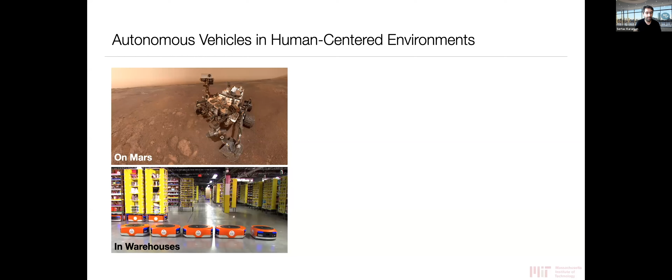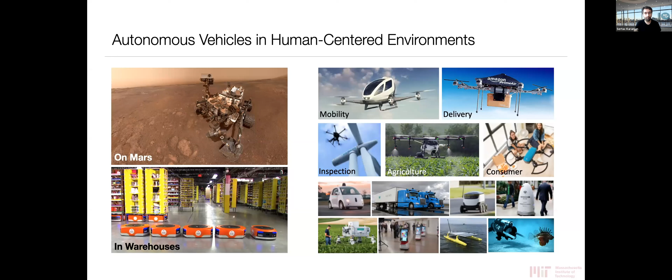We're doing a number of different things in this arena to introduce autonomous vehicles into human-centered environments. I'll give you a quick example. One thing we're looking at is when autonomous vehicles encounter human-driven ones, how should they behave? For example, would you build an autonomous vehicle that cuts into every human driver, or one that is extremely cautious and waits for every other vehicle to come forward? One thing we've looked at is introducing something called social value orientation from social psychology, a metric that social psychologists use to measure how people behave.

And in particular, they look at how people behave in terms of reward to themselves and how people behave in terms of reward to others. It turns out that looking at people's social behavior and psychological behavior, you can actually understand how people behave in different ways, and then you can engage with people in that manner.

For example, if you find people who are more altruistic, they'll stop for you if you're an autonomous vehicle so that you can go. On the other hand, if you find people who are a little bit more egoistic, who try to maximize reward for themselves, they will not stop for you, so you'll have to wait for them in traffic if you wanted to get into the environment of an autonomous vehicle.

We've been developing a number of algorithms and testing a number of strategies. For example, we've looked at different kinds of data sets to understand as an autonomous vehicle comes together with other vehicles, can we look at other human-driven vehicles and try to estimate on the fly whether they're going to allow us to merge or not in a highway. In other words, are they going to be altruistic or egoistic? And depending on that, we can cut in front of them or not.

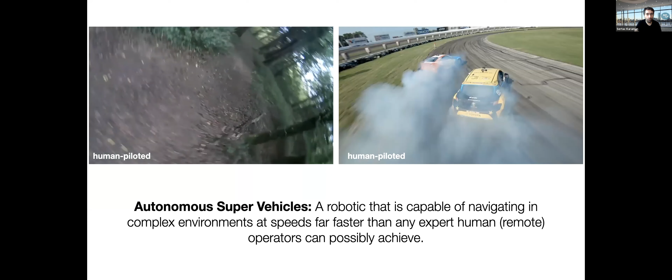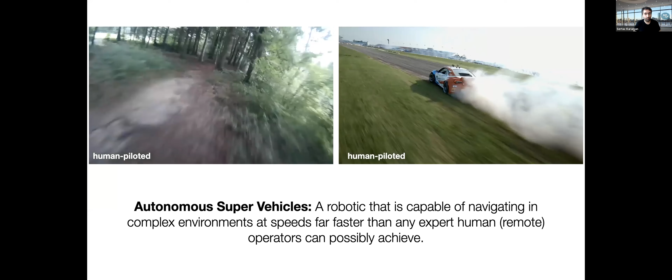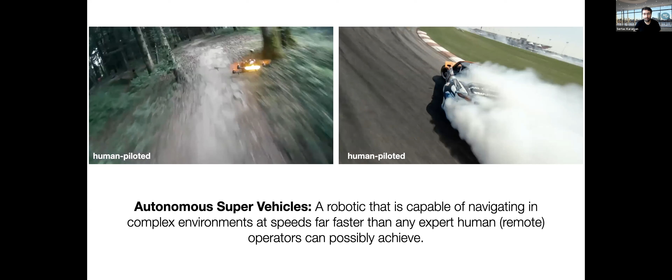And humans can do a number of other things. For example, there are events that they can fly - humans can fly drones through complicated forest environments, and humans can even fly drones to film things like racing events. You can imagine if we were able to do the same things autonomously, we may be able to use drones in forest environments for search and rescue to find people who are lost, or to find people after disasters. And if we can do the thing on the right, maybe we can automate some of the events for the media.

In my group, we focus on something that we call autonomous super vehicles. We try to develop robotic vehicles that are capable of navigating these kinds of environments far, far faster than any human possibly can. As humans, we have certain limitations in terms of, for example, how fast information can possibly travel through our neurons. Autonomous vehicles don't need to have those. This has a big impact on autonomous driving or driving in general as well.

There are more than 30,000 people every year who die in traffic accidents just in the United States, and more than 1 million globally. Imagine taking all those fatal accidents and, right at the time of an accident, turning on an autonomous super vehicle that can run cameras reaching up to 1 kilohertz, think far faster than any human, and just nudge the car so slightly that a fatal accident became a near miss.

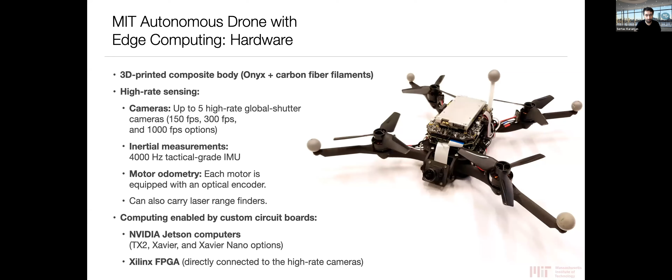We've been building a system, currently in the form of a drone, that has a 3D printed body. It has cameras that can go up to 1,000 frames a second, inertial measurements that are tactical grade running at 4 kilohertz, and we even put odometry on the motors, which I'll show you in a second. It can carry other sensors too, and it uses FPGAs and GPUs at this point to do computing.

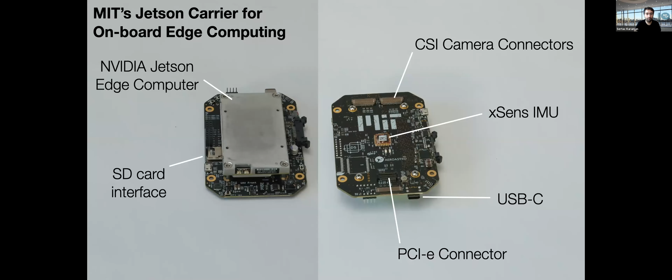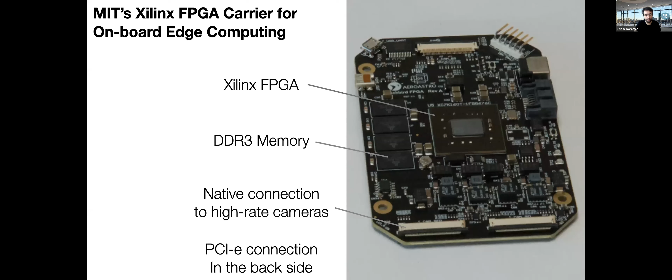In order to do that, we had to build our own circuit boards. We built our own NVIDIA Jetson carrier in our group, which I believe is one of the most advanced carrier boards out there for NVIDIA Jetson computers. It features a USB-C port, a PCIe connector, an IMU, CSI camera lanes, an SD card interface, and much more. We've also built a 10-layer circuit board that carries FPGAs and DDR3 memory and connects the cameras using native high-rate camera lanes, and this board connects to the other one using the PCIe on the back side.

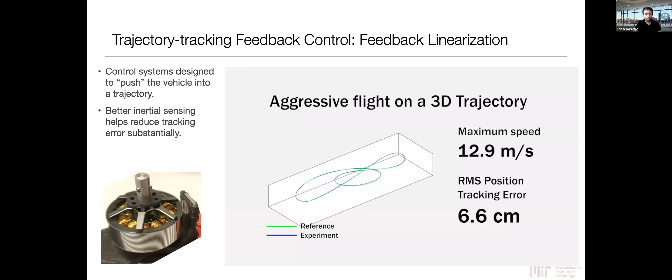I'll show you what the system can do in a few videos.

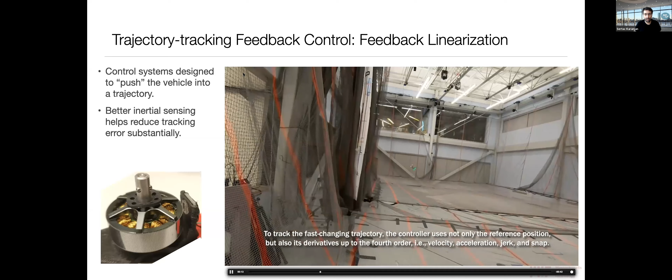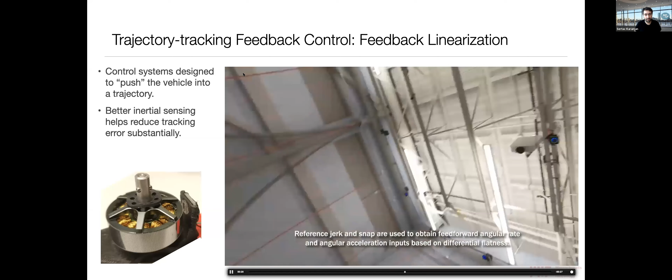Here you're seeing our drone flying in our motion capture laboratory, a large laboratory we have at MIT equipped with motion capture cameras. The drone seems to be doing some crazy motion, but it's trying to track trajectories as it flies extremely fast. These trajectories are tracked as the drone goes up to 30 miles an hour in an environment that measures barely 7 feet, introducing about 6.6 centimeters of tracking error, using some very high-rate odometry on the motors.

We can do a number of other things. For example, we can turn the trajectory to be followed into a circle, and the drone will naturally flip around to go through this.

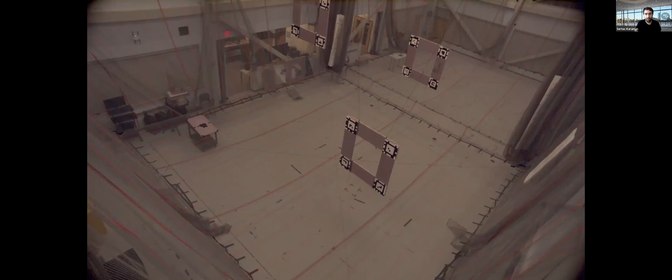Here is one event that we've been considering. You'll see the drone in the upper left corner as it emerges. It races through a number of gates, turns around in a circle, then flips around to pass the last gate, goes very quickly into the final gate, and finalizes the turn.

Building autonomous vehicles this fast is quite challenging. You set up these gates, run your drone very fast, and build a drone with massive amounts of sensing and computing that probably costs, if you build one by one like we do, more than $10,000. You hit one gate and you lose the drone—not only the $10,000, but also the time spent building it.

So we've built a sort of virtual reality environment for drones. We fly the drone in a motion capture room, take its position and orientation, run it through a game engine, and generate camera images for the drone, passing those back to it. In this way, the drone flies in a completely empty room but hallucinates a different environment that it's flying in, and it's very safe—if you crash into an obstacle, that's just virtual and nothing really happens.

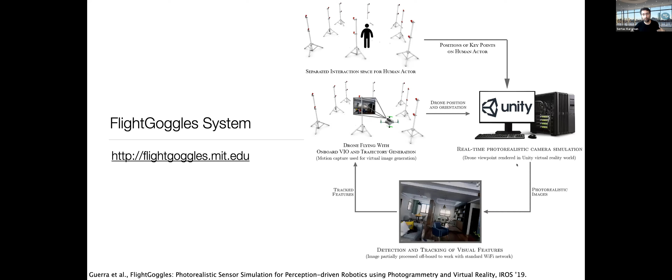So you can rewind back and retry. We can also connect humans who are in a different room so they can be together present with the drone. We get a chance to do a number of different things by connecting a variety of environments, putting drones in, or sometimes putting miniature vehicles and humans together, and we enlarge the vehicle so that humans and vehicles can be in the same space.

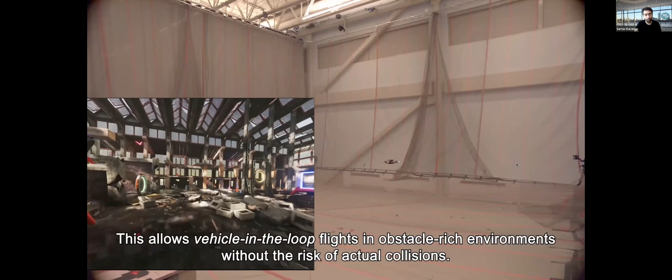Let me show you an example. Here is our drone flying in a warehouse environment. The environment is completely virtual. You can see the drone is actually flying in an empty space and hallucinating, if you will, this other environment in virtual reality. Here, one of my students is in a different room, just walking around, and the drone is going around this person to film him. They're in completely different physical environments, but in the same virtual space.

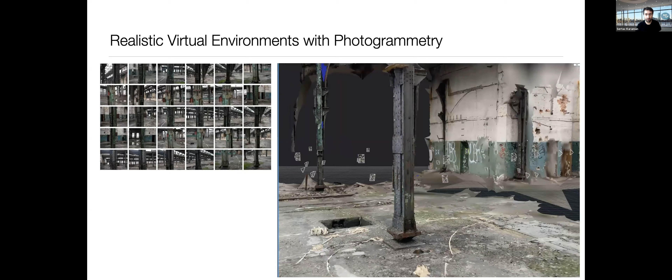In this manner, we built a very large environment, sort of that makes up a warehouse. For this purpose, we've scanned 80 different objects, generated them in 3D, and used 1,000 instances of these objects to generate this environment that you're seeing. And that's where our drone was flying. I'll get back to this environment in a second.

We've actually utilized this environment in an autonomous racing competition that was fully virtual, and then later we made that competition fully real - I'll get back to that in a second. But I'd like to let you know, although it's not officially announced yet, I'm saying it publicly here for the first time: we've been building a fully virtual version of 2 floors of MIT Stata Center.

MIT Stata Center is, I would say, one of the landmarks of Boston. It's a Frank Gehry designed building. It includes MIT's Computer Science and Artificial Intelligence Laboratory, as well as the Laboratory for Information and Decision Systems, where part of my lab is also located.

So here I'm showing you a bunch of pictures - I didn't make this into a video so that you can see it better. These pictures you're seeing are not photos; these are actually renderings of what we can achieve in scanning these environments into virtual ones. These shots are from the basement of the building, and here are the shots from the first floor of the building. We're still building this environment.

Once we build this environment, we'll be looking at a number of other things - for example, can we learn in virtual environments and transfer them to reality, if we can build virtual environments in this much of a realistic way? We will also be using this in some of our teaching efforts that I'm going to mention at the end of my presentation. I'd like to mention one thing before I continue to the next part.

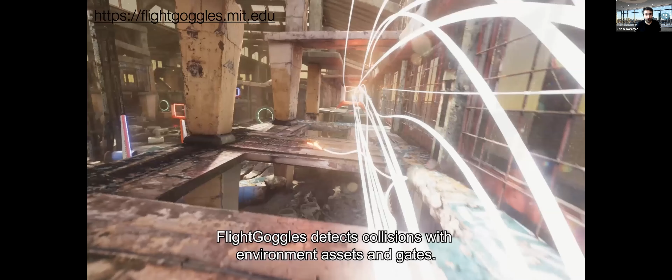So they race - all the people who participate, all these teams that I mentioned, race one by one. But I'm just putting their trajectories and how their drones navigate fully autonomously in the simulation environment all together. As you can see, these are the top 20 teams in the challenge, and they're doing pretty good once you're in the simulation challenge. Of course, there's a whole bunch of crashes that we've also observed as people try to go through the simulation environment, but in general, people have been doing extremely good.

I'd like to say that the simulation challenge is something that we've done back in March of 2019. We've invited these teams to MIT for the first time in June of 2019, and then we've done the real racing challenges with the real drones between October 2019 and December 2019. I'm happy to announce that in December 2019, we've actually awarded University of Delft in Netherlands a $1 million prize after they won the challenge.

So next in my list, after talking about autonomous social vehicles and autonomous super vehicles, is autonomous miniature vehicles. When I talked about autonomous aerial vehicles, a lot of people imagine vehicles of this size that you can hold in your hand, maybe following you around or doing certain types of inspection.

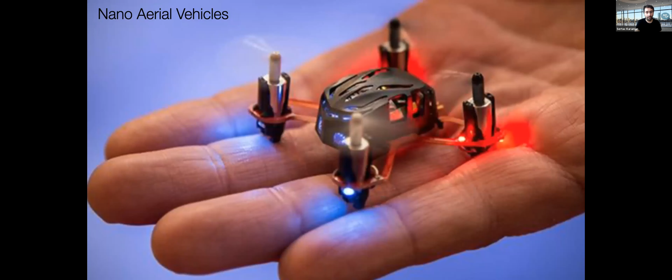But this is not as small as autonomous vehicles go, even though we call them micro aerial vehicles. There's vehicles this size called nano aerial vehicles, and there are even vehicles that can fit on a bigger fingernail. It turns out that at this scale, motors become extremely inefficient, so it's much more efficient to flap your wings to fly. If you look at this landscape, there's a big difference in size, and as you can imagine, a big difference in energy consumed in operating.

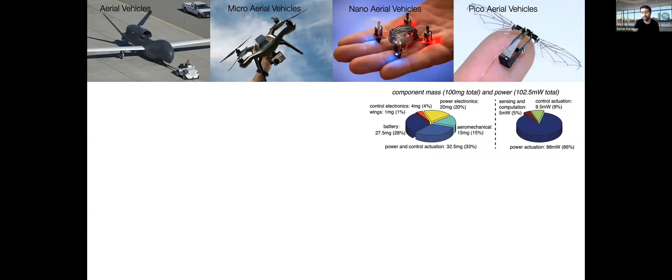For example, the vehicle in the upper right, the Pico aerial vehicle that's the size of a fingernail, takes only 100 milliwatts to lift itself and fly around. On the other hand, typical computers we utilize, like the powerful CPUs and GPUs that fit on cars, could consume as much as 100 watts. Even the embedded GPUs we use in building intelligent drones are about 10 watts. So you need 10 or maybe 100 watts just to turn transistors on and off so you can understand your surroundings, while it takes only 100 milliwatts to lift itself.

So what we've been doing is actually designing the computers required for these vehicles from the ground up—not just the algorithms, but the computing hardware and algorithms together—so we can achieve similar intelligence to what we see on drones or imagine for autonomous vehicles today, but at a cost of around 100 milliwatts.

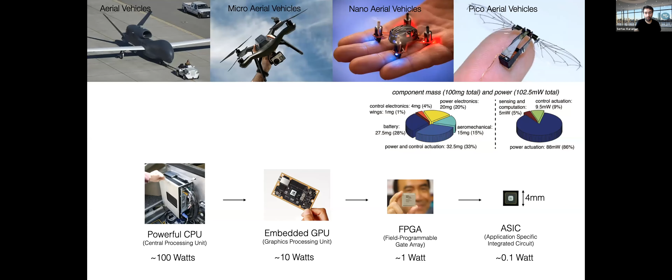This has a number of applications. I call them autonomous miniature vehicles—for example, little flying vehicles or little satellites. There are also applications for vehicles that can walk on water, soft robots, or even insect-sized ground robots. And there are opportunities not just in miniature vehicles but in long endurance vehicles too, like blimps that can stay in the air for maybe years.

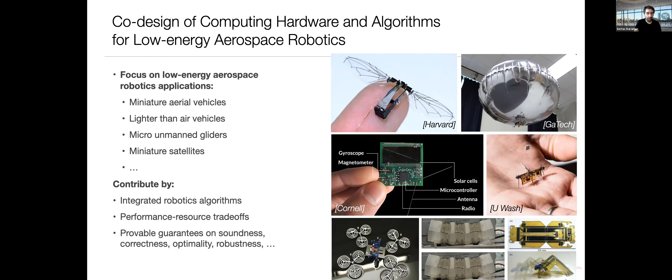We've done a number of things in this domain, but one thing I'll introduce is a chip we've developed that consumes only 2 milliwatts on average running at 30 frames a second, and 24 milliwatts at 170 frames a second. It measures 4 millimeters by 5 millimeters, is fabricated on a 65 nanometer node, and can run visual inertial odometry together with bundle adjustment in the back end.

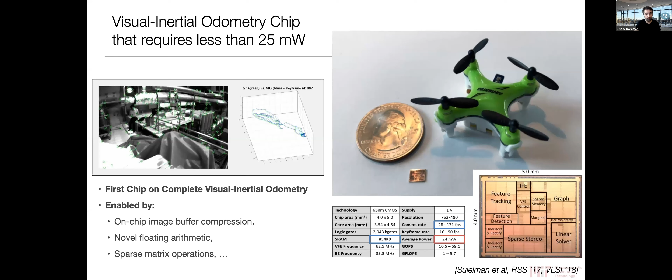So you can imagine what this can do, as you're seeing on the other side: it detects a number of features on the camera image and tracks them. It then integrates that tracking information with inertial measurement data to find the position and ego motion of the camera, IMU, and chip system with respect to its starting point. These kinds of technologies are extremely useful for miniature vehicles, as well as for virtual reality and augmented reality devices, or similar technologies like on your smartphone.

There's a number of other opportunities in this direction. For example, not just visual inertial localization, but we've been looking at how we can do depth sensing—imagine taking a camera input and generating a depth image so you can understand where obstacles are. We've been looking at computing for exploration tasks to determine the next best places to go. There are even some very interesting, challenging, and intellectually stimulating problems in decision-making and planning.

For example, if you try to plan a path that reduces energy consumption for actuation, like fuel or battery consumption as you fly, you may think very hard to find a trajectory that expends very little battery during execution, but you just spent so much energy computing this path. In some sense, you need to balance how much energy you expend computing a path versus actually executing it.

So there are some very interesting problems at this intersection of circuits and robotics, where we look at low energy systems.

I'd like to say that all of this autonomous miniature vehicles work is joint work with Vivienne Sze, who also has a talk in this Autonomy conference tomorrow at 11:55 a.m. She'll go into much more detail on autonomous miniature vehicles, as well as her own work on AI. If you're more interested in this part of the work, please tune in at 11:55 a.m. tomorrow.

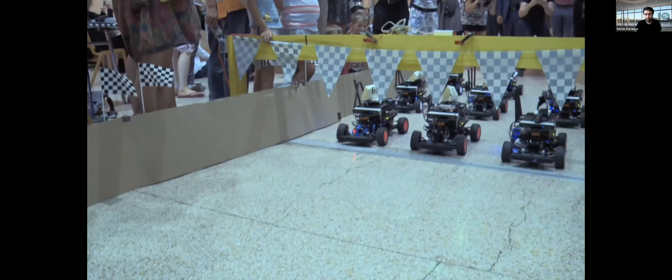I've been working since 2016 on a high school program called the MIT BeaverWorks Summer Institute. This program started in 2016 with this video you're seeing, as a summer program for high school students. It was a spin-off from my undergraduate robotics class at MIT called Robotics Science and Systems, for which we had developed these little miniature cars you're seeing.

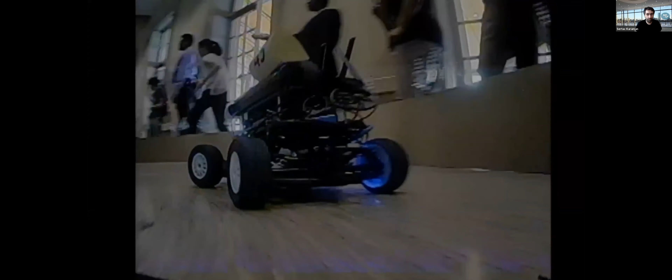And for the first time, we kind of gave it to high school students so that they can develop fully autonomous software that makes these vehicles, little vehicles, fully autonomous, so that they can understand AI, they can understand robotics, and they can get excited, and we can kind of embed them into STEM fields.

We started the program in 2016 through the MIT BeaverWorks initiative, which is an initiative between the MIT School of Engineering and the MIT Lincoln Laboratory. And I kind of spun off for the first time my class as an autonomous race car Grand Prix. These are the students that we attracted at that time: there were 46 students coming from all around the United States. So this was in 2016.

In 2017, we actually grew it into 2 more courses, one of them was inspired by the other undergraduate course that I teach at MIT, so we introduced that as autonomous air vehicle racing. We attracted, in this case, 100 students who came to MIT as residential students, spent 4 weeks at MIT, and we also, prior to that, had 300 students online who would take an online class during the spring semester.

And in 2018, we grew this to 200 students who spent 4 weeks at MIT, taking one of the 8 courses at that time. And admittedly, at this point, I wasn't able to teach 8 courses myself, but we had a whole bunch of staff, about 80 people helping out from MIT Lincoln Laboratory from a number of different fields. At this point, we grew the program, not just the autonomous racing, although the autonomous racing part was about

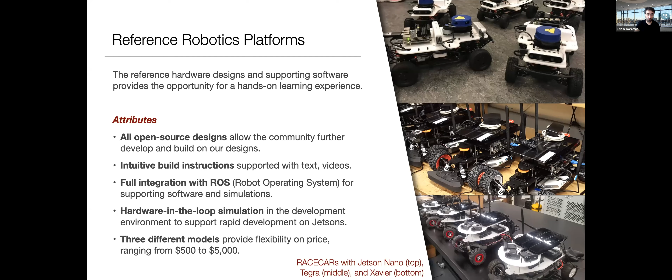We're also building a large platform for hands-on online learning, so that students can tune in and try out a bunch of different kinds of classes on their own. They can learn in that way, and then we're also kind of making this into a bit of like an app store, whereby people can put their own courses running on the same sort of vehicles and same sort of development environments.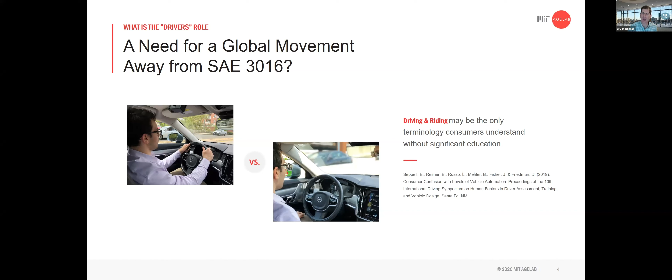A number of years ago, now in its fifth year, I formed the Advanced Vehicle Technologies Consortium at MIT, which is now supported by about 17 different automotive stakeholders, from manufacturers such as Toyota and Jaguar Land Rover, Audi and Volvo, to safety suppliers such as Aptiv, Veoneer, Lear, Google, as well as other key safety stakeholders, to begin to look at how people are using advanced driver assistance systems, early stage automation, automated driving features such as Autopilot, Super Cruise, Pilot Assist, and other related technologies in production vehicles on roads today.

How do we look under the cover at how people are beginning to leverage technology to help inform and build better educated guesses as to how to innovate forward tomorrow? A lot of the world in autonomy has looked to the far reaches of what may be possible 10, 20, or 30 years in the distance. I, for one, believe there's a lot we can learn from looking at what's occurring today to iteratively move faster in changing the safety landscape on the road today, and getting technology from the classroom, from the laboratory, into people's hands to improve mobility decisions.

So how do people adapt to these technologies? How do they use them, or avoid using them, to begin to leverage technology more strategically as part of our lives? One of the things that we quickly realized is that there is a huge data gap.

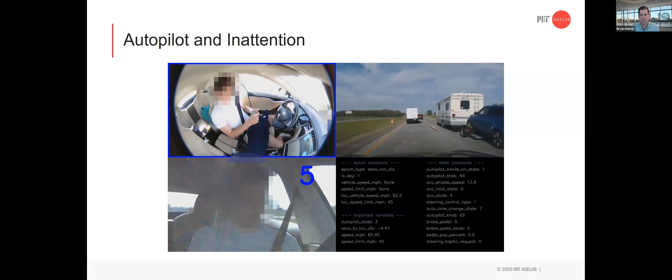In the video here, we can see an individual driving in one of our equipped vehicles with Autopilot, fidgeting with something in their lap, reacting to emergent changes in the roadway environment. Who would expect that an individual is going to attend to the world around them when the driving responsibilities are no longer there? Perhaps it's the salient looming effects of what's going on around us, but what's going on on our nation's roads, and the changes in risks and fatality numbers, are really predictable based upon some of the technology changes that we see.

The automation is good for a first generation system, but it's the innovative driver management system that is really critical. So when much of the technology world looks at the automation here, they say, hey, it's not really that good. Well, it isn't. It's not aiming to be a level 4 or level 5 automated system. It's aiming to be a system that includes the human as part of the decision loop, leveraging human expertise when it makes sense and machine intelligence combined together, fused together, much as the aviation industry has long proved since the early 80s was the key to cockpit safety.

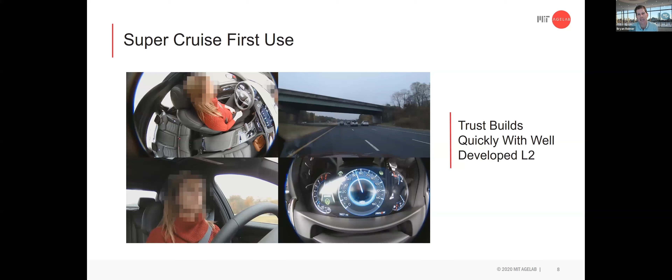So a couple features of the GM system. We begin to move from level 0 or manual control to level 1 or assisted driving, ACC, adaptive cruise control, over to level 2 or lateral control and distance control together. It's the transition harmony between these states that allows people to learn effectively and begin to leverage these systems.

We are not born with the skills to understand how to work with autonomy. We need to build them. And it is an intuitive design of these systems that it's key that we begin to learn about the pathways to these technologies.

So if we look at a couple of the key features within the system, call it the blue state that GM has designed in here, an override state. I'm not comfortable with what the automation is doing. I want to pass a car. I want to change lanes, allowing the human supervisory control.

The key here with Super Cruise is that there's a driver management system that only allows you to look away from the road for up to 6 seconds. We need drivers relatively attentive with the brittle automation that exists today. So again, the key, allowing us to supervise the automation simply and seamlessly, and the automation to resume control when it can.

Let's call it the red state, where the automation has exceeded its operational bounds and it is looking for the driver to take control imminently. The alarm I'm not playing here, obviously cueing an individual's attention, changes in the illumination in the instrument cluster, something is wrong. So in the case here, in stop and go traffic, the automation is looking for the human to support it.

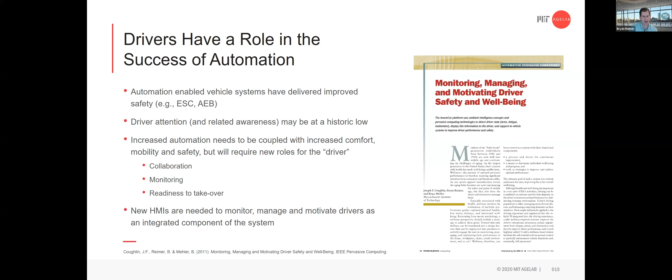So we really need to think more deeply about human-centered considerations of attention management. We've been focused for so long on trying to get distraction out of the car—the smartphone, the cell phone conversation. Perhaps what we've been missing is that these technologies are being brought into the car because driving itself is boring most of the time—it's not attentive enough, we don't need to attend to the road constantly because nothing's happening out there.

As we automate more, less attention is required most of the time. But in the rare instances where something goes wrong, how do we ensure we're redirecting attention most efficiently? The Yerkes-Dodson law of arousal suggests we need to calm and relax drivers when they're overloaded, overstressed, and over-distracted by secondary activities, but alert them and promote reasonable attention strategies when they're not. So it's a complex mix of solving distracted, drowsy, technology-influenced driving together in context.

We believe strongly in the lab that we can do this with the aid of automation, supporting drivers effectively. So the advances in HMI critical to supporting drivers and riders involve new display contexts—how do we ensure drivers are aware of the mode the vehicle is operating in, aware of what's occurring around them, and aware of the operational relevance of different information? When is it critical to be alert and ready to take over, and when is it okay to relax a little more?

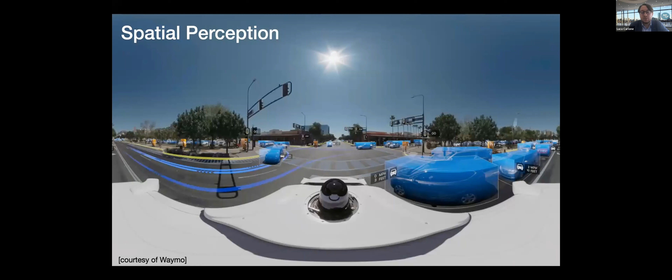You have to imagine that in order to navigate this intersection, your self-driving car needs to figure out where are the lane boundaries, obstacles, detect other vehicles, potentially track the speed of other vehicles, detect traffic signs, and potentially also reason over the future intention of the other vehicles. So these are all spatial perception problems. It's about essentially for the autonomous vehicle to figure out the external world.

Simply put, spatial perception includes a number of challenges here, and I list just a few of them which are important for this presentation, including object detection, localization and mapping, object tracking, among many others.

One thing worth mentioning is that while for this presentation I'm going to go back to self-driving cars a lot, spatial perception is a key capability for practically all robotics applications. If you think about domestic robotics and the Roomba, these will have some vision-based localization and mapping system, which is used to support navigation. So we'll have some onboard perception.

Similarly, for applications in factory automation, here I'm showing the Kiva system from Amazon Robotics, and many other applications, including infrastructure monitoring and search and rescue. One thing worth mentioning is that even applications not traditionally associated with robotics, such as virtual and augmented reality—there is actually no robot here—are indeed based on the same algorithms for spatial perception produced by the robotics community. So the algorithms are essentially the same.

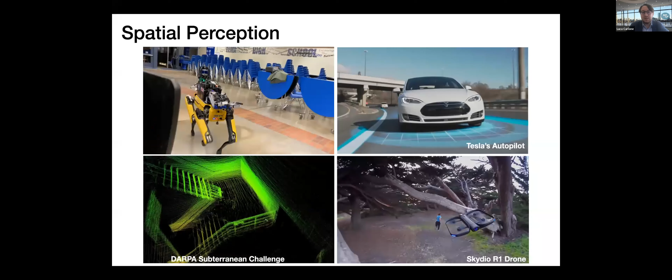Here I'm just showing 3 examples to give you a visualization of what's going on. On the left, I'm showing a project we've been working on together with JPL and Caltech, part of the DARPA Subterranean Challenge. A robot, which in this case is the Boston Dynamics Spot, has to move in a completely unknown environment and build a 3D map of the environment in real time, sensing and understanding the environment in real time. DARPA has been funding this effort with the goal of doing search and rescue in complex underground environments.

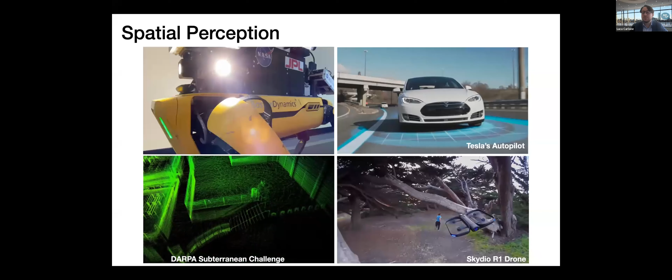While this one on the left is more on the academic and research side of things, in this meeting everybody will be aware that right now all major car manufacturers have been working on some sort of self-driving car technology, and perception capabilities are really at the core of these technologies for self-driving cars.

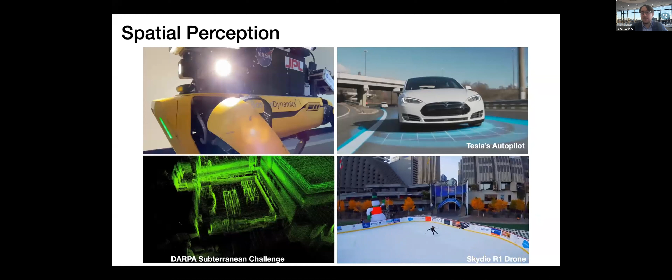I'm putting another example here at the bottom right, which is the use of spatial perception for autonomous drones. I'm providing an example from a compelling startup called Skydio, in which the drone is able to navigate in a completely unknown environment using onboard perception capabilities, and it's going, in this case, to track a human moving in the environment.

While it is worth stressing that there is a huge amount of progress being made on these technologies, a core message of this presentation is that there is still a huge gap between what robots are able to do right now and what are the capabilities of human perception. There is a large gap between robot perception and human perception.

In this presentation, I'm going to touch upon two main aspects. The first one is robustness for high integrity autonomous systems, which everybody in this event will essentially pay attention to. The second one is about high-level understanding. I will structure the presentation in these two parts, starting from robustness for high-integrity autonomous systems.

Why do we care about robustness for high-integrity autonomous systems? Well, it turns out that perception is a key capability for autonomous vehicles, including self-driving cars. And we have to realize that these applications are essentially high-integrity applications in which failure of the perception system often has catastrophic consequences on human life.

This is an example everybody will be familiar with. In March 2018, a self-driving Uber vehicle failed to detect a pedestrian and provide timely warning to the emergency driver, killing a woman in Arizona. There are a few other examples mentioned also in the previous presentation, for example the Tesla Model X, still in 2018, crashing against a concrete separator because the vision system misclassified this concrete obstacle for a lane and decided to turn into it.

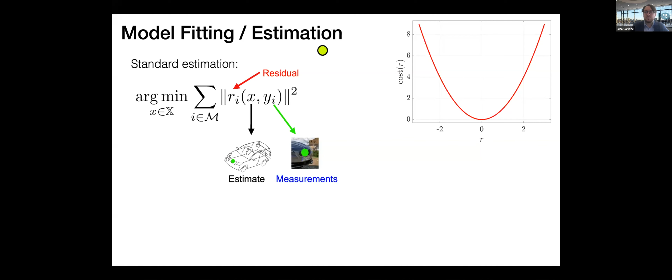It's a least squares approach, so that's why I'm putting just a quadratic function here. And the issue is that if you have outliers, this least squares approach will produce a very poor estimate of the location of the car in your image.

So what we did here is take a step further and ask: can we consider a formulation for estimation which is robust to these outliers? We look at the robust estimation literature, where essentially an easy and standard way to extend estimation to be robust to outliers is to include binary variables theta, which can be 0 and 1.

This binary variable will be in charge of deciding whether a measurement is an outlier, shown in red, or can be an inlier, in green. Depending on whether the measurement is considered an inlier or an outlier, the optimization problem will try either to fit that measurement to the model or just to discard it right away.

For those of you more on the mathematical side, you realize that essentially we replace the quadratic function, which is the least squares cost function, with a truncated quadratic cost function.

So what I'm saying is that if we can solve this formulation to optimality, essentially we're guaranteed to find all the inliers and outliers, and we can use this information to get very robust estimates of the position of the car, the location of the car in the image.

Unfortunately, pretty early on, we got a very negative result on this direction. We got an inapproximability result saying that outlier rejection, this type of problem shown at the top, is inapproximable in the sense that there is no polynomial time, no fast algorithm that can compute even an approximate solution to this problem.

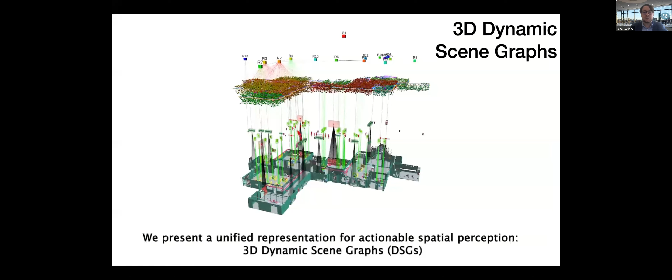Before concluding, I want to mention we are also shooting for even higher level understanding of the environment, similar to what humans can afford, where not only can we reconstruct a metric semantic mesh of the environment, but we can also reason in terms of agents, objects, and different places, for example rooms and buildings - a really hierarchical representation of the environment that can support decision-making and planning.

We're paying attention in particular to heavily populated environments, which right now we're testing in photorealistic simulation like this one. But you can imagine this kind of technology will be readily usable also for self-driving applications.

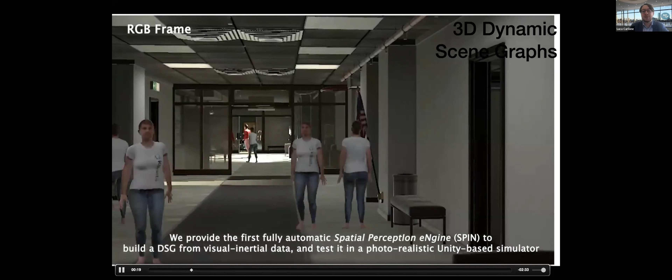Unfortunately, I will not have time to go into the technical details of these. I'll conclude by saying that spatial perception is a key ingredient for autonomy. Safety critical applications really require robust perception. We've been working over the last 2 years on certifiable algorithms as a practical approach to get robust performance. And we're also working on the idea that high-level understanding can really enable autonomy applications and can be a way to enhance robustness as well.

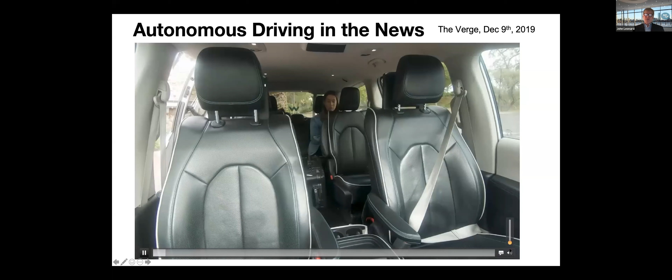In Arizona, Waymo: "I'm about to go for a ride in one of Waymo's fully driverless cars here in Phoenix, Arizona." So Waymo are giving fully driverless rides, empty driver's seat rides, which partly is just kind of mind-blowing. But it shows how, at least in that operational design domain, they've really achieved a lot of maturity.

They've taken Arizona Cardinals football players, like Larry Fitzgerald, for 15-minute rides with no one in the car. And someone posted this on Instagram, which really blew me away - I don't know the full context, but it's a Waymo with no one in the car stopped at a school crosswalk. That's a pretty amazing challenge in terms of deploying these vehicles loose in the wild.

If you look back in time, before the Uber fatality, there was tremendous hype in self-driving. This caption captures it: in the past 5 years, autonomous driving has gone from maybe possible, to definitely possible, to inevitable, to "how did anyone ever think this wasn't inevitable?" This is where I would raise my hand and say: it's not inevitable, people. This is a really hard technology, and it's going to take a lot longer.

So for me, my personal self-driving journey really starts with being a grad student in the late 80s at Oxford working on SLAM, coming to MIT to work on underwater vehicles, getting involved in the DARPA Challenge, where I was team leader with an amazing team of people.

I was sort of a critic of self-driving on the sidelines, capturing driving data with dash cams in Boston and pointing out difficulties. But then since 2016 I've joined Toyota. Initially I was on sabbatical, now I'm just a day-a-week consultant, with our approach we call Guardian, which is one of the ways we think we can get this technology into the marketplace. So my background - I feel like I won the lottery in life in my career. I started working on the problem of SLAM, simultaneous localization and mapping, before it was called SLAM, and didn't get very far, but articulated some of the challenges.

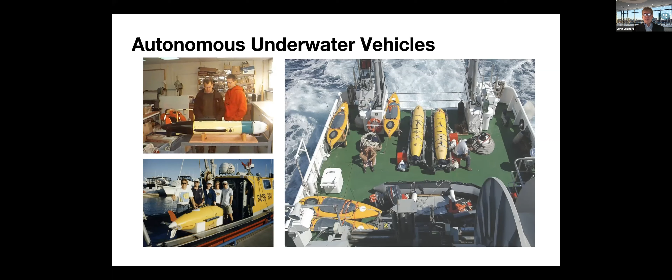The SLAM problem, to me, I think about the different challenges along different axes: how do we represent the environment, how do we perform inference, how do we build systems and make them autonomous. Over the years we've moved from different types of representations - metrical, topological, dense representations, things like Kinect Fusion, TSDF, truncated signed distance function - but moving increasingly towards objects and semantic mapping.

My research challenge is very much similar to Luca's, in the sense of aiming for robust, lifelong autonomy - robots that can take the output of deep learning systems but use them in a robust way. We work on state estimation, data association, learning, and we try to deploy robots in the ocean in various places and think about the challenges to get from the lab out into the real world.

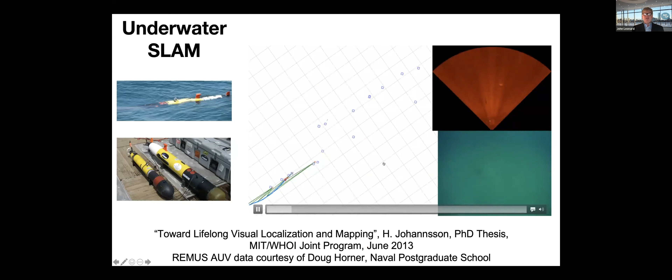I had a lot of experience with underwater robots. We developed a mine hunting system for the Navy where we deployed small robots that could use a prior map made with expensive sensors, deployed on a low-cost vehicle, to navigate into a field of objects to try to find targets of interest. We tried to attack the SLAM problem in a generic way so it would apply in many domains.

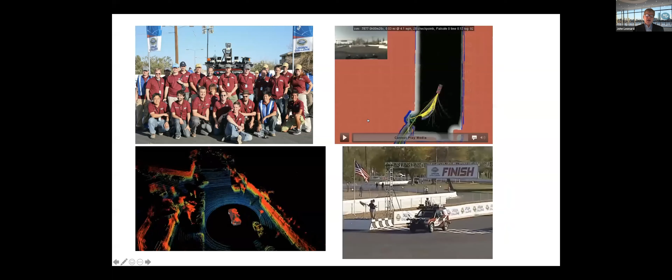My self-driving journey really came into force in 2006, 2007 when I joined with John How, my late colleague Seth Teller, and Emilio Frazzoli for the 2007 DARPA Urban Challenge. We had a pretty amazing team of students and postdocs, shown here in just a few little video clips.

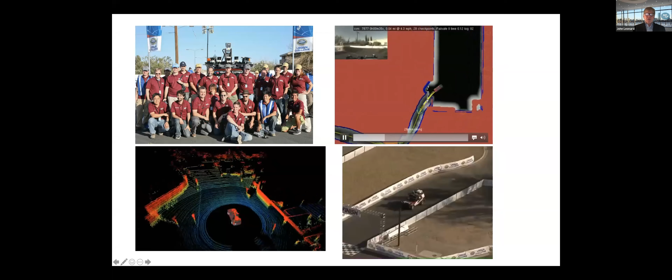This is Velodyne laser data driving up Mass Ave from MIT to Harvard. This is the RRT path planner that John How's group and Emilio Frazzoli developed, which the vehicle would use to build a local model of the world and then try to choose paths through that world that were safe and met mission objectives. It was a very long story.

We came in 4th place. I'll say a little bit more about that in a minute. But our team, if I look back in time, as faculty members, our product is our students and our postdocs and what they go on and do.

This is Albert Huang, who's Sertac's co-founder with Optimus Ride. Ed Olson started up May Mobility. To me, it was sort of like a Woodstock of robotics experience. We were huddled in hotel rooms, having team meetings, working on decisions on code and planning and strategy, anxiously watching when our vehicle was deployed, coming back, watching the data logs.

If you think about what it takes to build a self-driving car, the Urban Challenge is a good example. You have the high-level navigation, finding the waypoints, where am I going, how should I get there through my route map at the symbolic level, feeding a motion planner that tries to solve the tactical local navigation of what path should I choose, going down to a low-level vehicle controller.

The planning and control is on the left-hand side of this picture. The right-hand side has the perception and sensing, where we're taking sensor data from laser scanners, cameras, and radars, feeding it into a local model we call the grid map of the world, which shows where are the drivable surfaces, where are the lane markings, where are the obstacles, can we predict tracks for different vehicles.

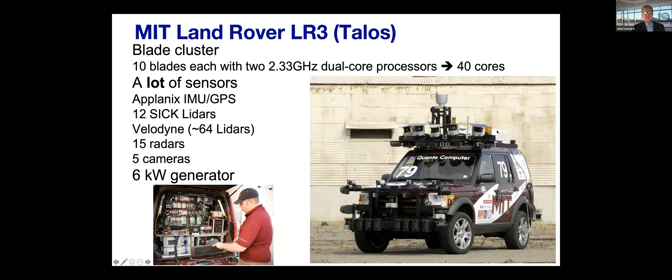Seth insisted on this, having a blade cluster in the back, which at the time was a pretty ambitious computer. It had 10 blades, each with 2 processors, 4 cores, and it required 3.7 kilowatts of power when fully loaded. We used a 6 kilowatt RV genset in the back to power it, and a 2 kilowatt air conditioner on the roof to cool it. It was sort of a mobile supercomputer.

To make a long story short, Carnegie Mellon was 1st place, Stanford 2nd place, Virginia Tech 3rd place. We were 4th place, a pretty distant 4th place. We had a few incidents along the way, but we really tried out more of a perception-driven approach. We didn't want our robot to follow GPS blindly.

One of the key lessons of the DARPA challenge is that if you give the vehicle a really accurate a priori map, and the vehicle can localize itself very accurately with respect to that map, then it's easier to achieve a more robust behavior, because the vehicle knows its position and can make better predictions about what it should see. It kind of knows when something's going wrong or not. That's the approach that Carnegie Mellon and Stanford took.

We thought part of the mandate from DARPA originally was to do GPS denied navigation. So our vehicle was more tentative and cautious and sometimes got a little stuck, because it was trying to navigate more based on its visual and LiDAR perception of the world than on the prior map.

But if I go back to our team photo in terms of the legacy, here's Ed Olson, who founded May Mobility, Sertac, I'm extremely proud of, and Albert Huang, Emilio co-founded nuTonomy, bought by Aptiv, and Karl Iagnemma. Next to Ed, in shadow here, is Yoshi Kuwata, one of our postdocs for the motion planning. He's one of the engineers at SpaceX that landed the booster rockets back on the barges and on the ground for Elon Musk.

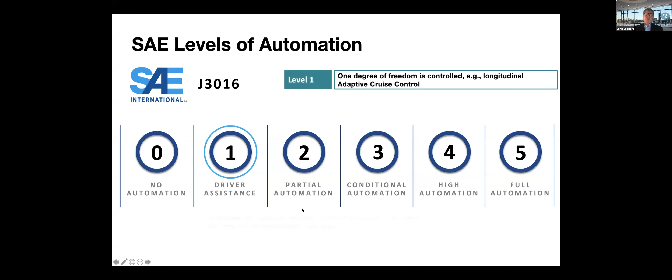It's important to distinguish between the levels of automation and the approaches to autonomy. I'm assuming many of you have heard of level 2 automation, where 2 or more degrees of freedom are controlled. You have to be ready to take over at any moment instantaneously for a level 2 system. Tesla Autopilot's a good example.

In level 3, which may or may not even exist in reality, the goal is that you would give the driver sufficient warning to re-engage in time for the handoff, maybe 10 or 15 seconds. But that requires a system with an introspective capability that knows when it's encountering difficulties. In level 2 and 3, the human has to guard the AI system, and people aren't great at that for vigilance decrement reasons.

Google chose to do level 4 and 5, where the human is only a passenger, perhaps in a restricted operating design domain. On the one hand, it's here today in Arizona, but on the other hand, to make it widespread there are really big challenges. Back in 2013, I started collecting dash cam footage from Boston.

This is one of my favorites near my house—actually a cell phone video taken by a 7th grader of making a left turn across traffic on a busy day. There are cars coming, this is at rush hour in the morning. It was a bitter cold day, driving some kids to school.

The cars from the left are coming pretty fast. There are occlusions—the tree, the mailbox. The cars from the right are backed up as far as you can see. The way that I pulled out was that I waved at another driver and she slowed and made a gap for me. Then I saw a gap and I went. That's the kind of social ballet of driving, the interacting with other people—that's really pretty challenging.

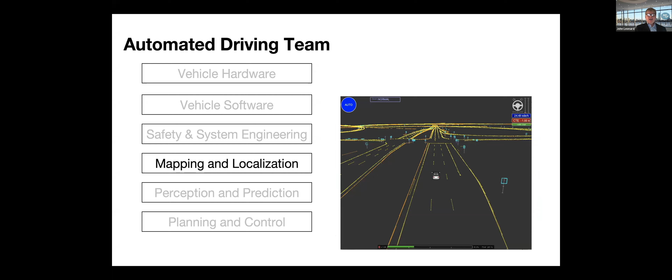Vehicle software is critical: safety, SLAM is everywhere, perception, using machine learning to do segmentation and prediction, planning and control, how you develop advanced controllers that can operate with uncertainty, monitoring the driver state, using machine learning algorithms for better detectors. Simulation is critical in many forms, processing data in the cloud, UX, and then finally our vehicle ops.

Our vehicle operators are some of my favorite people at TRI. They're really wonderful, they bring this great kind of experience, and the vehicle operators really have a great role that's played. So with my remaining time, I just want to give you a little flavor of a couple things.

Let me just check. So with Guardian, the goal is to try to re-envision having a safety system that can take over with advanced robotic technology.

I'm just going to play a little video. This is a bit old now, it's from fall of 2017. This is a demo we did with a dual cockpit steering system, so we made a car with two steering wheels to let us test both these autonomy modes, Guardian and Chauffeur.

In this video, you're going to hear Gill Pratt narrating. Ryan Eustice is going to be driving in the right-hand drive on the passenger seat with our safety driver, Sharon, in the conventional US left-hand side of the seat.

Now we're going to demonstrate our Guardian system. We're going to emulate what happens when a driver falls asleep. Guardian can tell by using a camera that's part of the dashboard. The camera can even see through sunglasses in order to see what the driver's eyes are doing, or if their head is moving into a position that indicates they're not paying attention. So Ryan, whenever you're ready, why don't you go ahead and pretend to fall asleep.

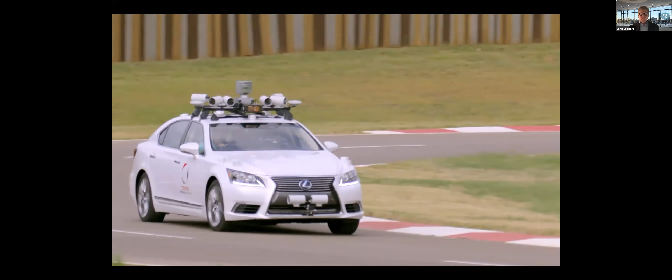One of the most frightening things that can happen on the highway is when a car in front of you switches lanes to avoid debris. You have very little time to react because your view is blocked by the car in front of you. We have sensors that can see significantly better than a human driver can see. The Guardian is going to take over where a car switches lanes in front of us in order to avoid debris. Here, that car switches lanes, Guardian decides we have to switch lanes also, and we avoid having a crash.

Now Guardian has offered to hand back control, and Ryan has taken control back of the car. So today you've seen demonstrations of two basic technologies that the Toyota Research Institute is doing research on. This is all part of TRI's work to eventually build a car that can never be responsible for a crash, regardless of what the driver does.

So our dream is to build a car that's incapable of causing a crash. This is from an article in October. We are working towards robotic vehicle demonstrations at the Olympics in Tokyo, which obviously, sadly, due to the COVID crisis, has been postponed. But this is one of our Platform 4 vehicles, where we've moved towards this more sleek, integrated design with advanced Luminar LiDAR sensors on the roof.

I could talk for an hour on this. We're a little bit under the radar screen in terms of various publicity and so forth, but this is the Toyota Times in Japan. There's a famous Japanese actor who visited us, and with more time I could show you a little bit more about some of what we're doing.

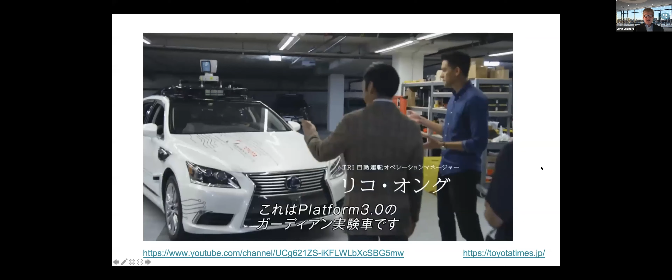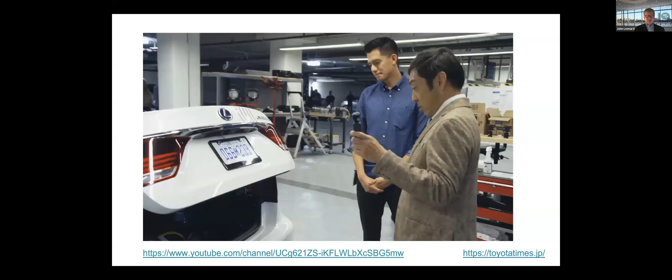So Kagawa-san, I want to show you some of our test cars. This is one of our Platform 3 Guardian test vehicles. This car has three types of eyes: LiDAR, radar, and cameras. This car's brain is actually in the back of the car, this is where the car thinks and reasons about its world.

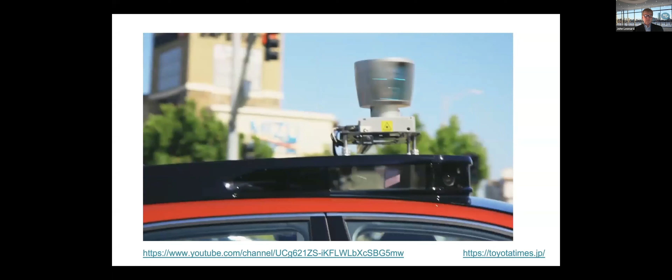Sorry, in the interest of time, I better not show you too much more of our tests. Okay, so I'm going to conclude and take questions.

I remain a contrarian for widespread self-driving in the very short term. I think there's an increasing realization that things folks like Brian and I have been saying for a while, that this is a very hard problem, are true. There were some unrealistic timelines before. I think the key question is not when will they be ready, but where will they be ready. We can expect incremental deployment in limited areas - that's already here, say Chandler, Arizona.

I think infrastructure can make a huge difference. I'm a believer in V2V, V2I communications, smart intersections. Let's invest in cities and make them safer. But many fundamental research challenges remain to be investigated. In my MIT life, we're working on robust semantic SLAM in complex dynamic environments, the kind of things Luca is working on. I think there are very rich open problems there.

How do you robustly couple perception to planning, achieving high integrity? And a whole other dimension - we'd love to hire more faculty members in this area of how you interact with humans with AI systems, the social ballet of driving. I am an optimist for safer, highly automated driving, maybe more in a 10 to 20 year time frame in terms of how we can make cars safer.

So at that point, I want to stop and take questions. Let me see how to do this here. Yeah, John, I can just read you the questions. Great, wonderful, you want to do that.